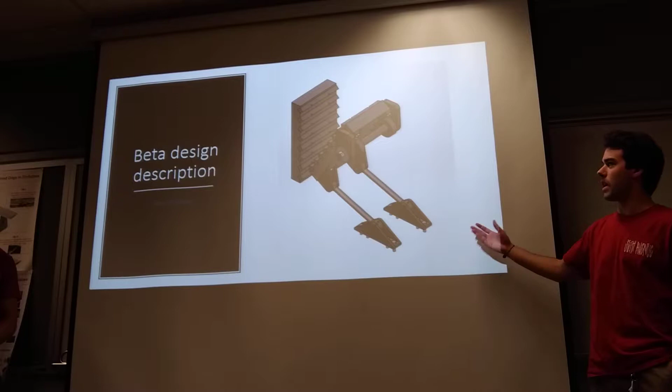Okay, we are Team 7, and we're doing Crush 1. So this is our beta design for our crusher. It's pretty much the same. Actually, if you go to the next slide. So this is just it inside the thing, but we have animations showing that our jaws are actually different.

Instead of the teeth being aligned in a horizontal fashion, they're vertical. We did that because instead of rocks being trapped down in the base, we were finding that you'd get rocks down there, and then you get large stress concentrations. So if we align the teeth in a vertical manner, you have less of those concentrations because the rocks are able to fall down smoother than getting trapped in the sharp edges.

This is what our design is going to look like inside the actual frame. There's going to be panels on the sides and a panel on the top where the feed system is going to be incorporated so that the rocks aren't going to just be shooting out the sides. We just did this open concept so that you could see how everything would connect inside. We have our brackets here that our camshaft connects to, which our power team talked about earlier, and our sprocket, which connects to their power team.

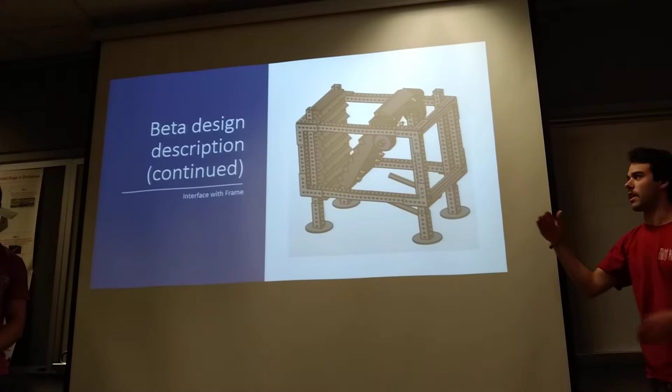Our lever arms are actually going to connect up. In this model, they were just kind of floating down for some reason, but they're going to be connected to the base here so that it'll keep it all in line. We actually have an animation that shows. Let's see if it runs. So this is our animation.

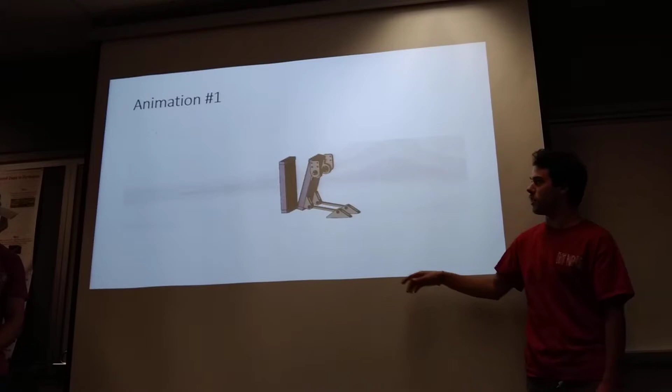This actually has our vertical teeth in it, and we have brackets on the top and the bottom that lock the teeth into place, and then it goes into the ability to rotate these teeth out, so you can use the teeth 4 times in total before you actually need to buy new stock for the teeth, which is going to improve the durability of the machine and extend how long you can use each tooth. So instead of having to change out a plate every couple months, you only have to change out the teeth over a longer period of time, so that makes it more efficient.

Alright, so when we were doing the FEA for this, we were trying to think how we're going to model a rock in the jaws, because the rock's not going to perfectly fit all the area in the jaws. There's not going to be a lot of contact area. So for one side of the plate, we decided to model a 1 square centimeter contact patch with 5,000 newtons of applied force, which is about 50 MPa of pressure, which is enough to break white marble, limestone, and other metamorphic rocks, which is pretty much what we were shooting for.

And then the material I chose to model it with is AISI 1020 steel, a low yield strength steel, just to see if that would work, because it's cheap, and if that's strong enough, then other steels will be strong enough. So our peak stress was 85 MPa, with our yield stress being 351 MPa. So we had a factor of safety of about 4.

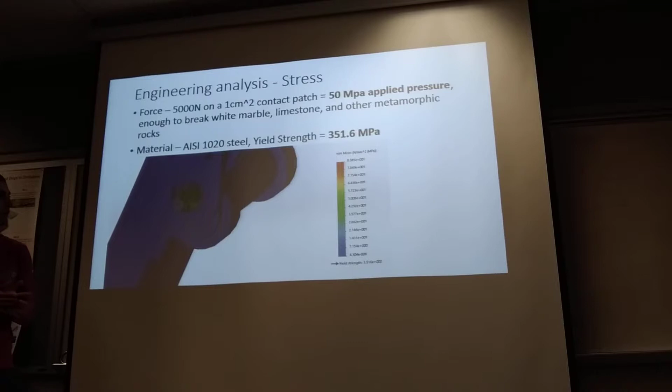Next slide. So here's our stress concentration in the fillet of our cammed shaft. Pretty much that's to be expected where the stress concentrations would be. Everything else is pretty geometrically normal and regular. Yes, so most of our stress concentrations end up being in the cam system on top. That can be a problem, because if that shaft actually bends, it'll misalign the jaw, and the jaw can become jammed up, and the machine will be completely destroyed.

It turns out that on the pin joints on the bottom, you actually don't get a lot of stress because the motion of the jaw is tangent there, so it ends up being mostly concentrated at the top. Nearly all the stress concentrations end up being in here on this fillet of that little crank right there. And the strain here is magnified quite a bit. It's moving just a minuscule amount in this part.

And our idea to prevent mechanical failure of the main rock crushing assembly, we're thinking that the chain should be properly sized so that it fails first, or some pin joint should fail, so that there's never a situation where we can apply so much torque to the machine that it will actually break it. As shown on that graph, the 3 main objects that had the highest chance of failure would be the chain, the camshaft, or the lower supports.

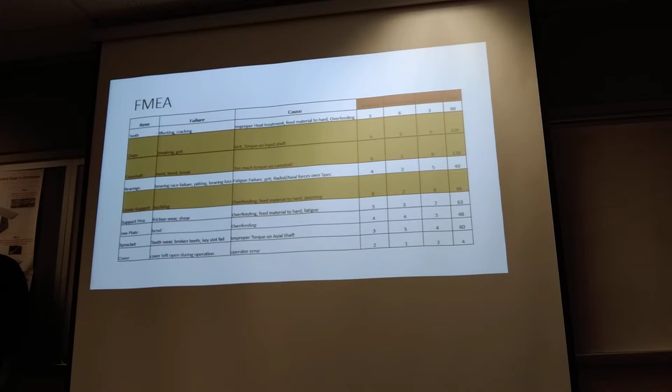Questions? So now you're using like vertical teeth. Yeah. So how do you mount those teeth? All right, I can answer that. So let me go back a little bit. You might not be able to see it very well, but see these top little... Oh, you can't see the mouse.

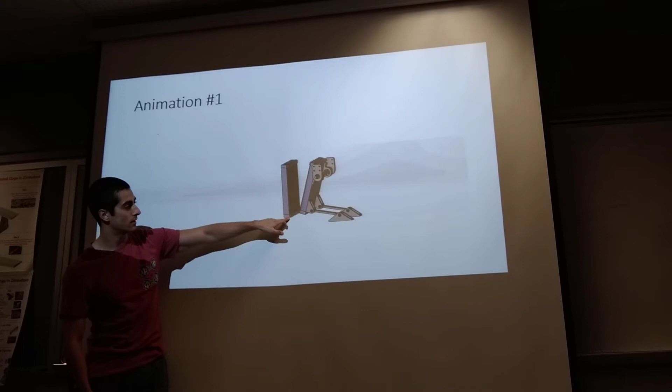Never mind. These little guys right here are bolted into the plate, and pretty much what it is, it's a little pocket, a little square cross-section pocket. So you would unbolt this top part, take that off, slide the stock into these pockets, where there's square little pockets that fit in those pockets, which this is an identical version of that. Then you put that top over, so it has two pockets, if you will, kind of holding that in place, and then it sits up against the backrest of the plate.

It makes it really easy to interchange them, because if they get worn out, take off two bolts, slide them out, slide new ones in. Super easy and quick. And the plate's also going to have chamfered out grooves where the stock's going to fit in, so the stocks aren't going to be banging up against the backside of the plate. They're just going to be resting in there nicely. Are the teeth actually vertical? Yeah, just kind of.

Are you worried about the rock just sitting in there? No, depending on the angle of the jaw, as the jaw moves, and if the coefficient of friction between the rock and the jaw face is high enough, and that angle is fairly shallow, it'll actually jam the rock in there and then crush it so it can't pop out. What if it's too low? Yeah, like if the jaw's angle, would the rock just slide up and down if the coefficient of friction isn't high enough? Yeah, or if the angle between the jaws is too high, it'll do that too. Okay. But that's easily adjustable by basically changing the lengths of those lower arms and then moving the mounts on top. So it's something we'll just have to adjust when we actually build it.

My other question is, how much torque is required just to move the jaw? Just move it. It's on a cam. So. Yeah. We didn't like to free spin it. We didn't figure that out.

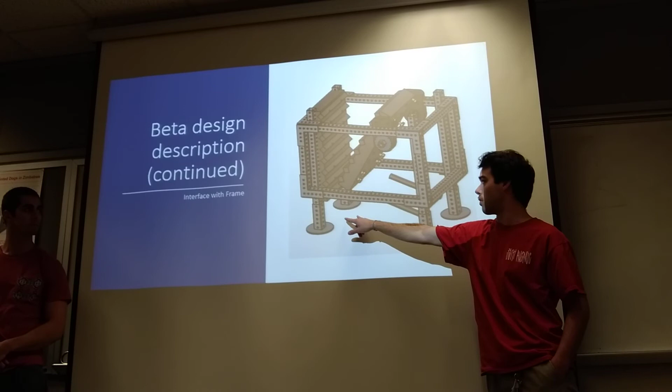So, with the image with the frame, you said that the legs were floating in air. How were you going to attach it to the frame again, and how would you place the sifter underneath it? Like, how would that work as well? Okay, so these are actually just going to be bolted onto the backside of the frame. Oh, okay. And then the sifter and catch cans would just be directly under where the jaw opening is, so that the rocks can easily fall straight through and it wouldn't impede any of the motion of the jaws in any way. And this system, you can raise and lower this. The team that was in charge of that made it so that you could raise and lower it depending on the size you need. So there should be no problem with the clearance of those cans or the catch system.

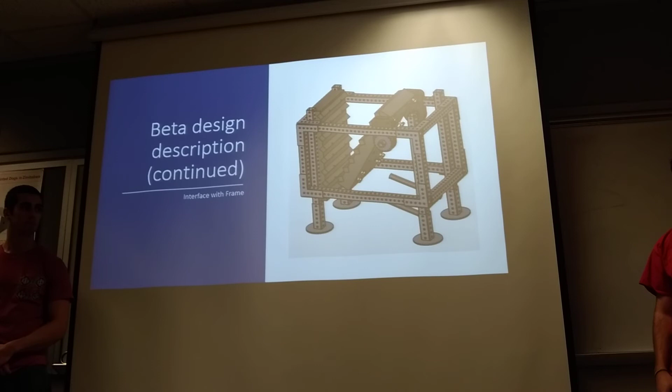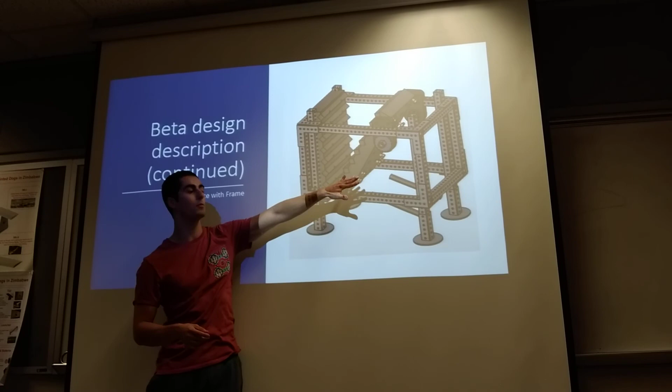Also, to build on that, because of cost constraints, we're going to have to shrink our design a little bit. So if this whole thing was smaller and up here a little bit, there would be more room for the sifting system underneath it. And this is more of our final design. So those legs right here, instead of mounting to the ground in that fashion, would then mount to the frame. So that's what we have to fix.

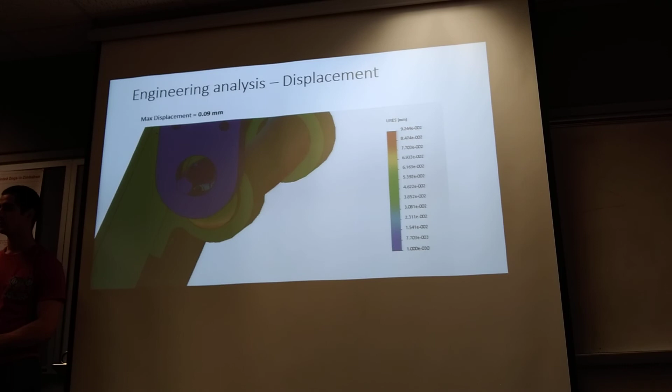I have one other question. Your jaws are super strong. Are you worried about those adjustable links bending and buckling? The lower supports? Yeah. In one of the simulations we did, we were applying 5,000 newtons. No, sorry, 50 megapascals to a 1 centimeter by 1 centimeter square, which is enough to crush a perfect rock with no fractures in it. There were forces on those legs, but it wasn't really enough to buckle them. And we were using hollow tubes in that simulation. We can just increase the thickness of the tubes or make them solid bars.

And for the cost, we figured out just the cost of materials to build it. It was over $600, and so we'd have to scale it down to like a quarter of the size. So it'd have to be this big instead of this big to be cost effective to actually build. But I was worried that if we do that, it won't be worthwhile to actually use it, because the crushed rocks are maybe this big at that point, and then you're probably just better off using a hammer.